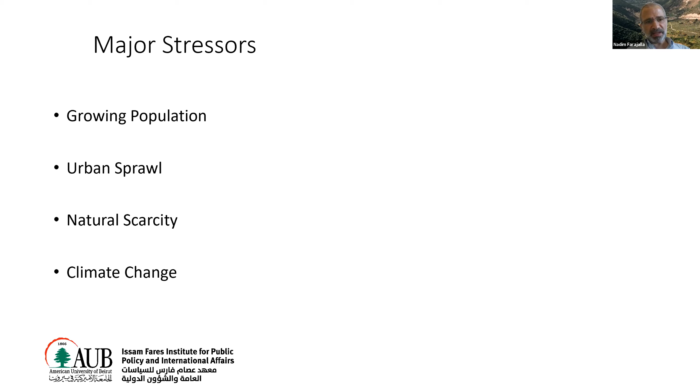Major stressors for Lebanon and everywhere around the world: there is a growing population requiring more water. Urban areas are growing, especially in Lebanon, horizontally rather than vertically, covering permeable surfaces so that water no longer percolates into the subsurface. In Lebanon, there is a growing natural scarcity, and as in most of this region, climate change is adding to that. So these are our major stressors.

Whenever you have a growing population and a growing economy, the demand for water always increases. And when you use water, you typically pollute it and return it. Most of the water that we take in is returned as sewage. So the water we get, 85, 90% at times more, is returned as sewage.

If that sewage is not treated and is dumped into water bodies, these water bodies are taken out as a source of water, and there becomes less and less water available for consumption. Hence, as the growing economy keeps growing and people grow more, there is a competition for an ever more scarce resource. This is where the major part of the problem occurs.

In Lebanon, the interesting and difficult thing is that 70% of the population lives along the coast. And in 60, 65 years, this has nearly doubled. It's phenomenal. 80% of the people live in urban settlements, and these are ever growing. The population right now is in excess of 6 million due to the influx of refugees. Originally, around 2010, it was near 4.5 million.

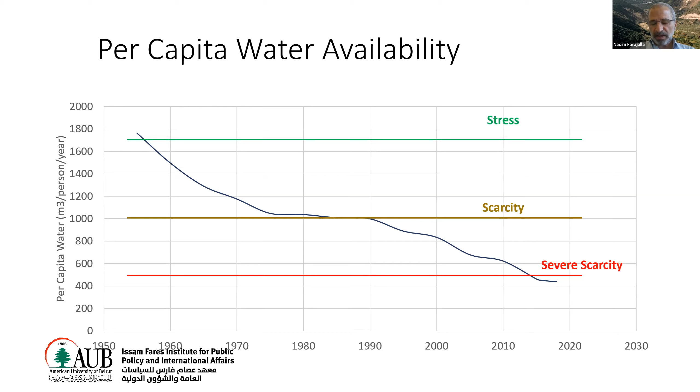So you can see how population increased and the per capita water availability dropped from being stress-free to being in scarcity. This chart shows how population was increasing and stabilizing, periodic increasing and stabilizing. Just before 2010, we were growing at nearly 0.9% rate, which is very low. However, with the influx of refugees, the population shot up, and this led to the drop in water availability to below the 500 Falkenmark index, 500 meters cubed per person per year. Now we're lower than 450, and it keeps dropping. What are we seeing nowadays?

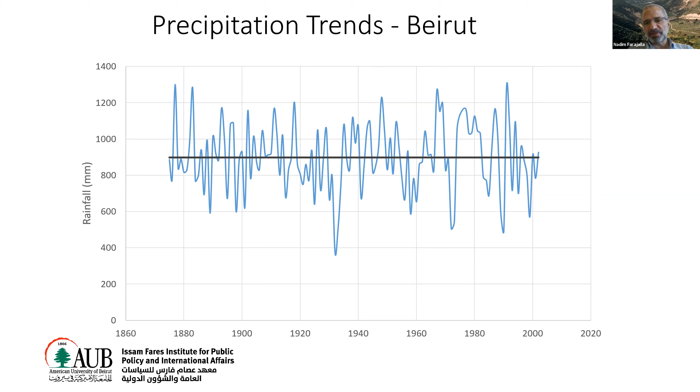If anyone tells you otherwise, they're wrong. Precipitation in Lebanon, whether along Beirut, the coast, or inland, has been constant for the past decades. In Beirut, for the data that we have at the American University of Beirut, since 1874 up until now, there is no perceptible decrease in precipitation. It's constant. There is natural variability, but it's constant. And you can see this in the Bekaa as well. For the past 60 or nearly 70 years, it's always been constant.

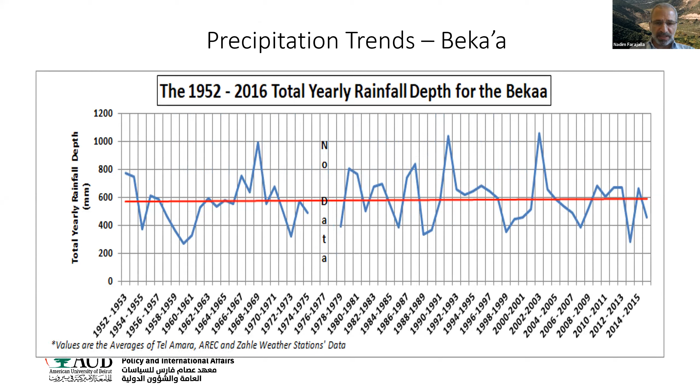Number of rainy days, again, has been constant. Temperature is the problem. The minimum temperature has been increasing, as has the maximum temperature. The minimum temperature is of concern because this is what keeps snow that falls on the mountains from melting quickly. As the minimum temperature increases, we often don't get snow and we get rain instead, and this reduces the ability to recharge groundwater.

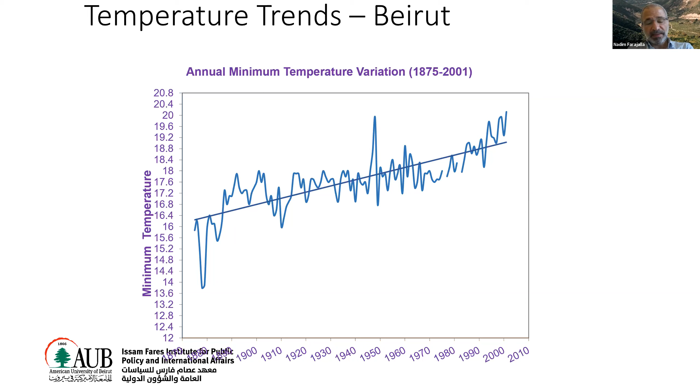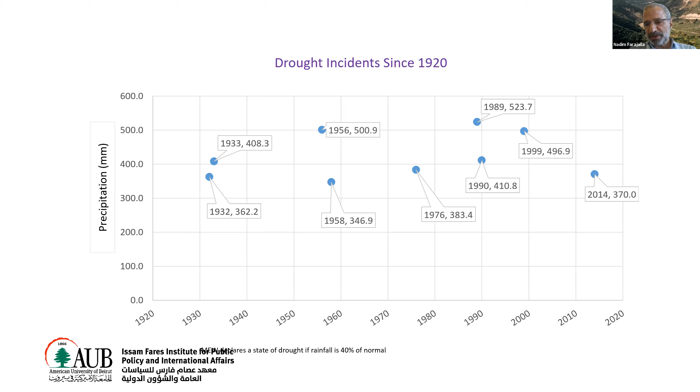Because as snow melts, it melts slowly, allowing the soil to take in the water and direct it to the subsurface. Drought incidents have been clustering and increasing. The last real major drought we had was in 2014, where only 370 millimeters of water fell on Lebanon. This is about 40% or less of what we usually get.

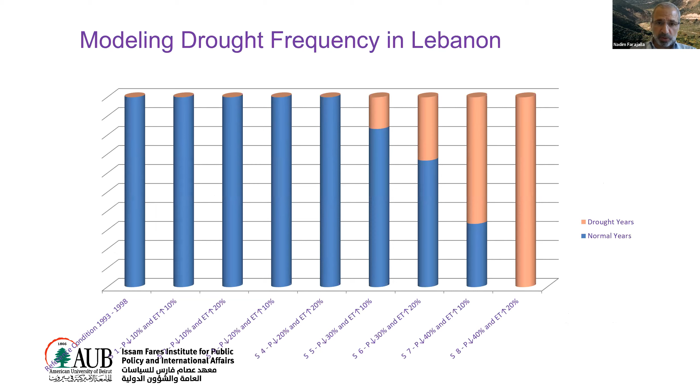And when we modeled drought, we found out that if the trends or projections that we have do become reality, instead of having one dry year every 6 to 10 years, we will get one normal year every 6 to 10 years. So that's an issue. These are givens. This is happening. Climate change is happening, and we need to keep that at the back of our mind.

The way we look at water security, traditionally we were looking at it in terms of if we have so many liters of water and so many people, how much can we provide? This is not water security. This is bean counting, and this is not good. Water security is much more than that.

Water security is impacted by hydroclimatic factors and by anthropogenic, human factors. We need to make sure that water is productive, that supports economic growth, that supports human health. We need to make it safe for consumption and safe for the environment. And we need to make sure every person has enough water to live healthily and productively. When we look at the impacts on the water sector, there is an impact on governance, on supply, on infrastructure, risks and hazards, economics, etc.

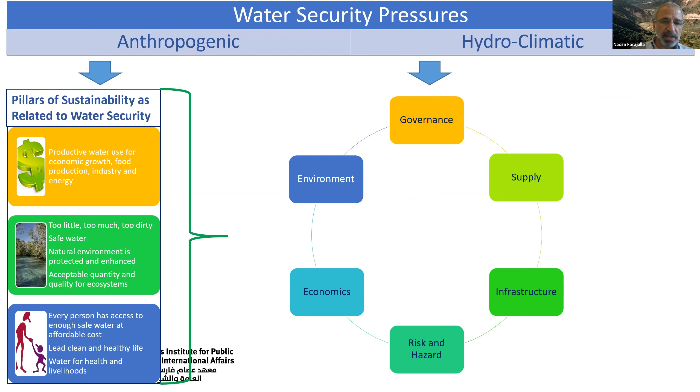All of this made us at the Issam Fares Institute come up with 6 pillars of water security. We call them household water security, which is how much water is made available to homes and also to farmers, and environmental water security, when we look at the water quality from the sources from which we take water and to which we send back our water.

We look into hazards and risks. We look into economic water security: how much are we making, or how well is the economy doing given the amount of money we pay into the water sector? How is our infrastructure doing? Because if we have an abundance of water at sources, but we don't have the storage capability or the conveyance capability, we might as well not have water. And then water governance: do we have the right policies? Do we have the right regulations?

Do we have the proper human capacity in the institutes to run them, to manage the water sector? Are we collecting the fees that we are charging? Are we charging fees fairly to have cost recovery? These are issues that are really central to making sure that Lebanon is water secure. And herein lies many opportunities.

The key I want to focus on, especially through the clean tech sector, the clean tech approach, is energy in the water sector. Electricity makes up 70 to 80% of the payment, or the cost, for the water establishments, because 70 to 80% of electricity consumption is in pumping.

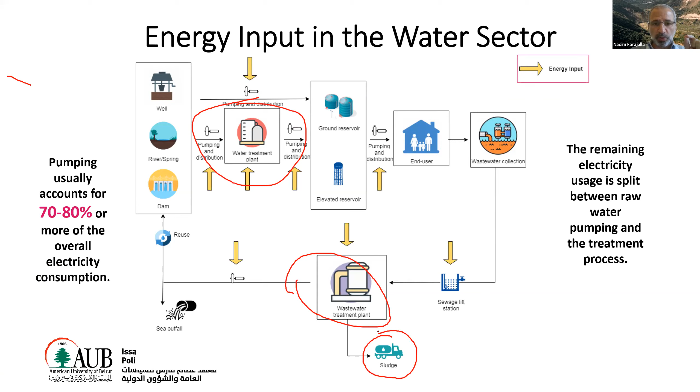In Lebanon, the wastewater treatment facilities that we have are not operational mostly because they don't have enough energy. And wastewater treatment facilities, keep in mind, can be a great source of water for reuse. They can be a great source of energy. When we digest sludge, we can produce methane that can be used to generate electricity or to power vehicles.

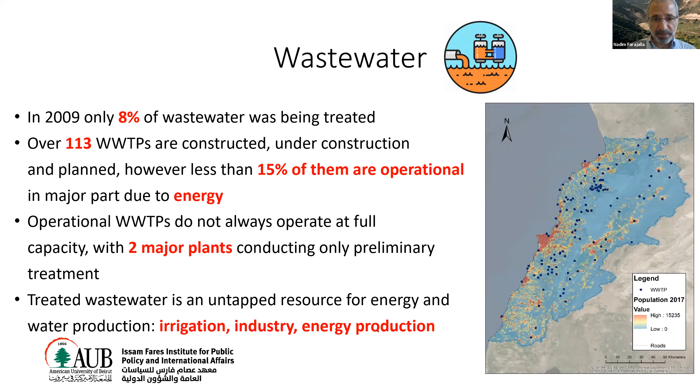We looked at Lebanon. The problem here is we have 12 to 15 hours of outage. Now it's even much more. The regional water establishments suffer from high electricity bills. Only the Beirut Mount Lebanon Water Establishment paid its electricity bills in full.

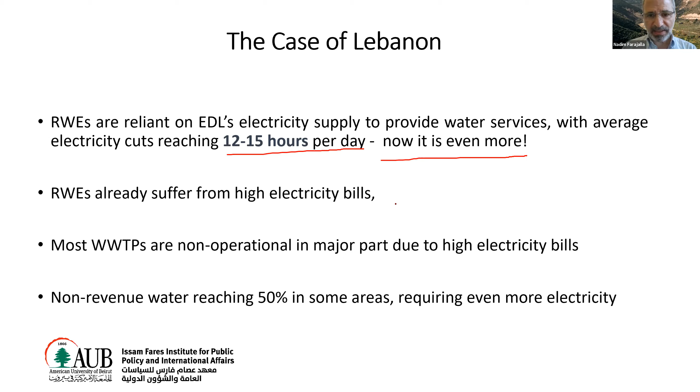And non-revenue water, that's the water that's lost in the networks and from people illegally hooking up to the network, is at times 50%. That means we are pumping water into the network, paying for fuel to pump water, and 50% of what's pumped is lost. So you are losing 50% of your money that goes into pumping. And keep in mind, 70 to 80% is pumping.

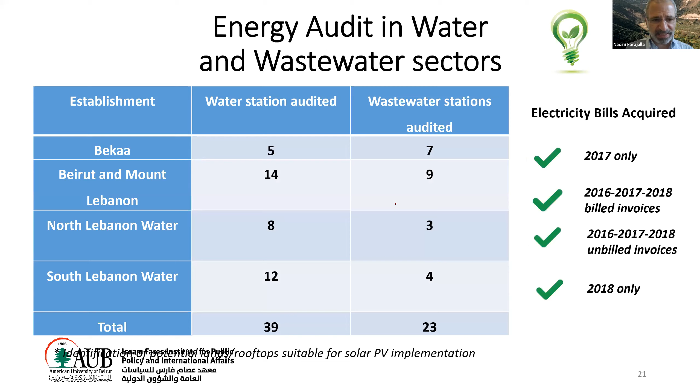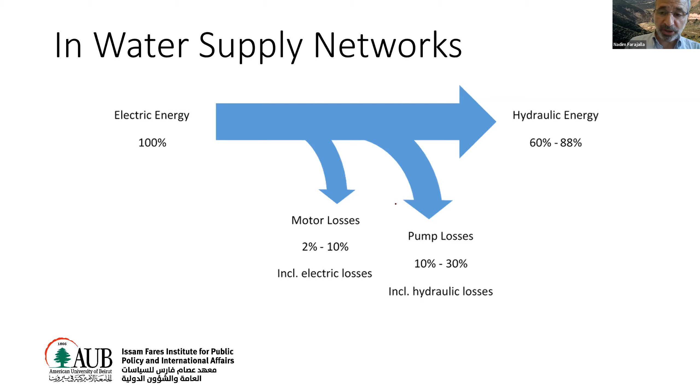We did a huge study that looked at 62 facilities, whether water or wastewater, and we did an audit. What we found out, this is just a guide for you guys: electric energy goes into motor losses, into pump losses, and the rest goes into producing hydraulic energy. Typically, if we are doing well, we have about 88%, 90% production of energy. If we're not, it goes lower.

The key takeaway of our studies, I'm going to go to two so that I'll leave time for discussion. There is no direct correlation between stations with high electricity bills and the performance of their pumps. We found out that in many areas, pumps are not working properly, but still the bill is reasonable. And in other areas, the pumps are working fantastically well, but the bill is high.

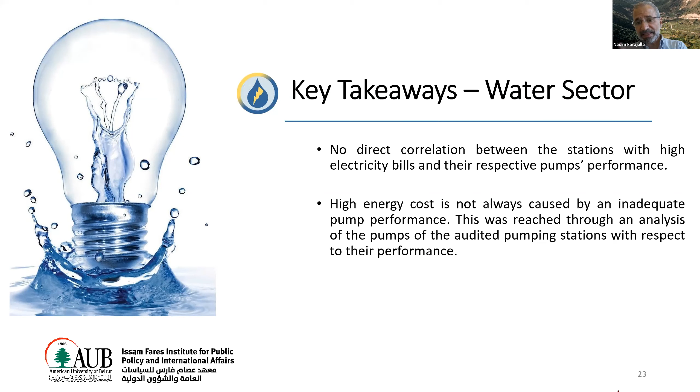The high energy cost is caused by inadequate pumps, but not always. We need to look at the design of the network and how it is operated. In wastewater, the design is important. We need to look at how we're designing the facilities, whether they are activated sludge, whether they are bioreactors, and the size. We found out, surprisingly, that smaller plants are more energy intensive than larger ones. So the scale needs to be adjusted, and we need to find a proper balance.

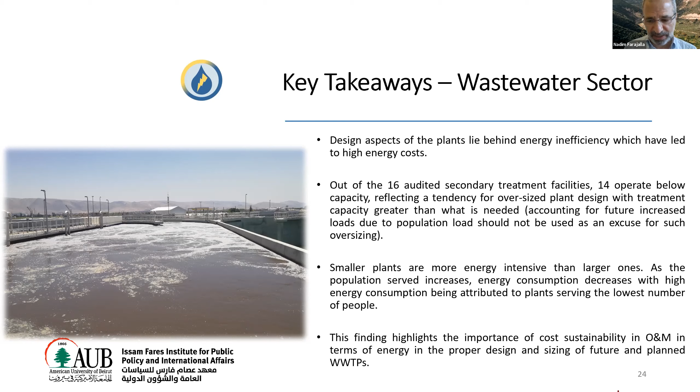And in both cases, in wastewater and water, the costs in operation and maintenance are critical to maintaining energy efficiency. So we need to be energy efficient in that sense. I will stop here and open it up for questions and discussion. Thank you.

Thank you, Dr. Nadim, for this great presentation. It's good to see that there are studies being done in Lebanon, because we always feel that we're lacking the numbers and the analysis, not only in the water sector but in many sectors in Lebanon. So hopefully these studies can be translated or taken into consideration while setting the strategies and the policies.

Yeah, Susie would have told you that this study we did is feeding directly into the new water sector strategy, the revision of the water sector strategy. It's a major part of it, and they're looking at energy efficiency and transitioning into renewable energy in the water and wastewater sector through that new strategy. So yes, they are.

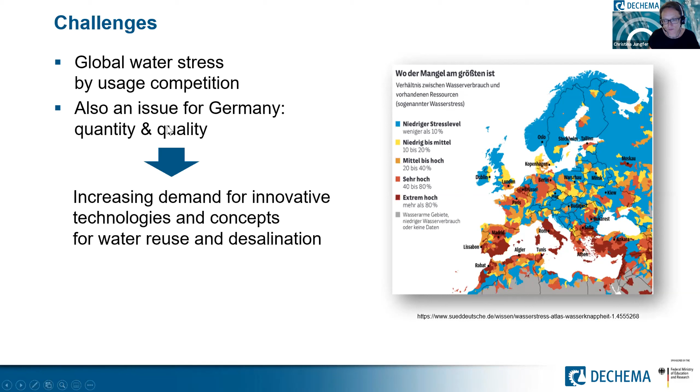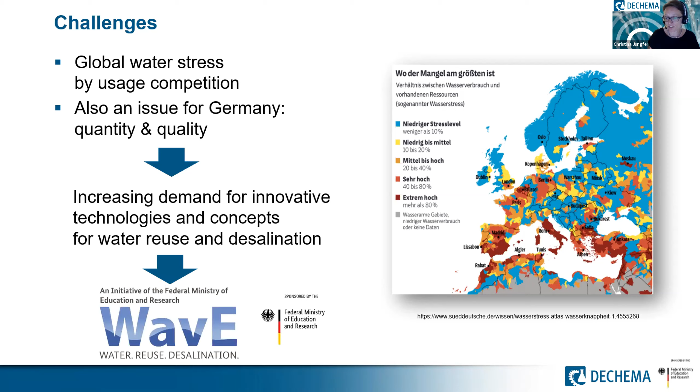So there is an increasing demand for innovative technologies and concepts for water reuse and desalination, for Germany and abroad. The Federal Ministry of Education and Research recognized these challenges at an early stage and started the funding measure WAVE already in 2016.

This shows its importance for Germany. The Federal Ministry of Education and Research funded this measure with a total funding volume of 32 million euros. We had 13 joint research projects with more than 80 partners funded in total, with high involvement of SMEs and industry.

WAVE was complemented by a scientific support action coordinated by DECHEMA, by us. The projects ran from 2016 to 2020. The project sites were located in Germany and abroad—we had 2 project sites in Vietnam and 1 in Namibia.

The main topics in this funding measure were three: water reuse by utilizing treated municipal wastewater, circularity and reuse of industrial water, and the desalination of ground and surface water.

Beside these 3 thematic areas, we had also cross-cutting topics that were interesting for all thematic areas and for different projects. This was risk management, which is crucial when practicing water reuse. Also crucial is the topic of salt and residuals, including the handling and management of concentrates. This is very important, especially for the industry, but also for other sectors. And of course the topic of technologies and processes, in terms of assessment of water reuse technologies and processes, or defining key performance indicators for these approaches.

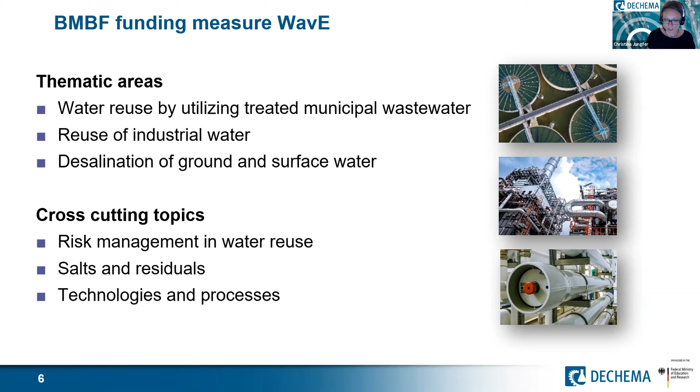The aim of the funding measure was to increase water availability, decrease the dependency on freshwater resources for different sectors, and therefore reduce usage conflicts and contribute to sustainable development. The 13 projects achieved these aims, and I will show some more details later. Our strategy was not only to develop innovative technologies and management concepts, but also to demonstrate them in Germany and abroad, have references, and be prepared for transfer into practice, so that these technologies and concepts can be implemented successfully.

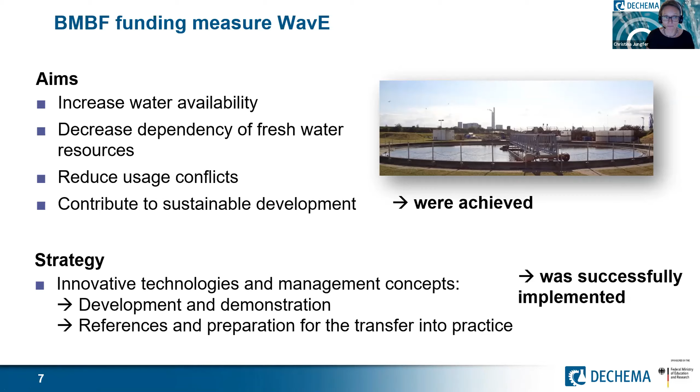Here you can see an overview of the solutions developed within WAVE. We had different solution approaches, for example increasing water availability by using treated municipal wastewater and developing flexible process chains to produce different qualities of water that can be used for different sectors and purposes. Also for groundwater recharge, this was a topic, and here multi-barrier processes and smart systems were developed.

For agricultural reuse, we used treated municipal wastewater and developed high-tech and low-tech technologies. For example, hydroponic systems, a high-tech technology, for reusing and making good use of the reused water, or also with ponds, cleaning the water within ponds, a very low-tech technology.

Also for coastal resources, meaning salty waters, efficient membranes were developed, modular concepts were created. For industrial solutions, integrated solutions, we wanted to find solutions for concentrates, what to do with them, how to manage water very well in industrial parks, reuse it better, and find solutions for different industrial sectors: chemistry, steel, automotive, mining, oil and gas, and ceramics. I will show a bit more later.

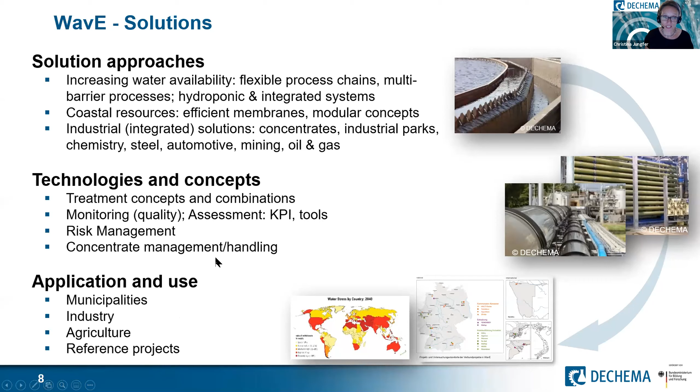We developed different technologies and concepts, treatment concepts and combinations. Monitoring was very important, including assessment with KPIs, assessment tools, risk management, and concentrates. The application was really for different sectors: reuse in municipalities, industry, and agriculture. We showed everything also in reference projects.

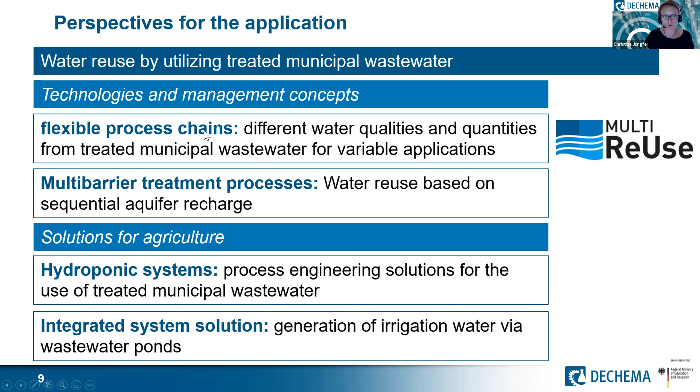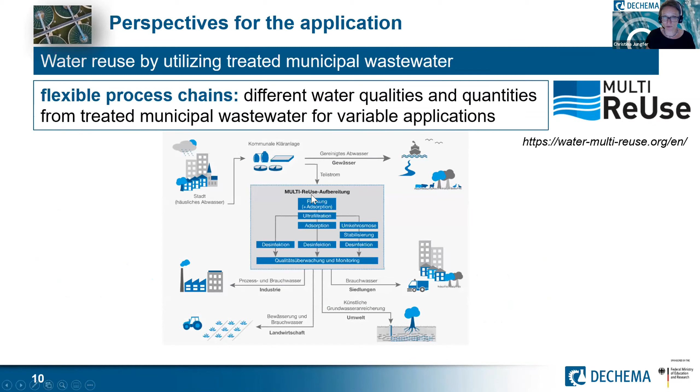I would like to pick some projects out and show you some insights. For water reuse by utilizing treated municipal wastewater, we had 4 different projects, and I will show you the MULTI-ReUse project. This project developed flexible process chains, producing different water qualities and quantities from treated municipal wastewater for variable application. Let me show you this a bit more.

Usually treated wastewater is being fed into the rivers. The focus of the research project was to reduce this instead, reusing with flexible process chains different qualities of water for different sectors like industry, agriculture, aquifer recharge, or municipalities.

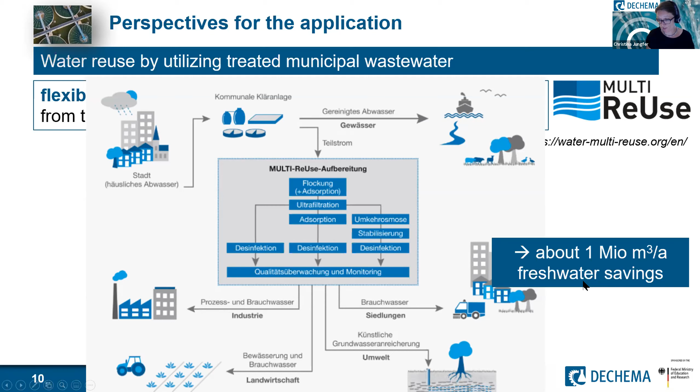New technologies and methodologies for reuse of treated wastewater were developed and tested in a pilot plant in the north of Germany. Reliable procedures for quality control of water were also developed, along with an evaluation tool and a concept to market the project results. What we achieved is that with these results you can achieve about 1 million cubic meters per year in freshwater savings.

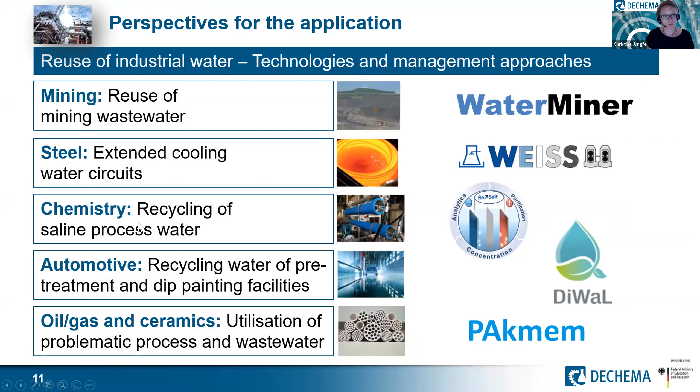Going to the next topic, the reuse of industrial water. We had a lot of projects developing solutions in different sectors, and I brought with me the example from the steel industry, which was looking for extended cooling water circuits. Water is an essential element for process and product cooling in the steel industry.

Due to the complex chemical composition of cooling water, caused by the use of cooling water treatment chemicals or the introduction of solids, oils, greases, and so on, no chemical-free and economic treatment process has yet been established on the market. The aim of the project was to increase the efficiency of cooling water use, reduce the amount of blowdown water by 50%, and thus reduce freshwater involvement.

In this project, different innovative technologies were developed for desalination, for example capacitive deionization, or fouling resistant coated reverse osmosis membranes. They also looked at how to manage concentrates, using high pressure reverse osmosis for concentrate removal or evaporation. These process concepts were developed in combination with a simulation tool.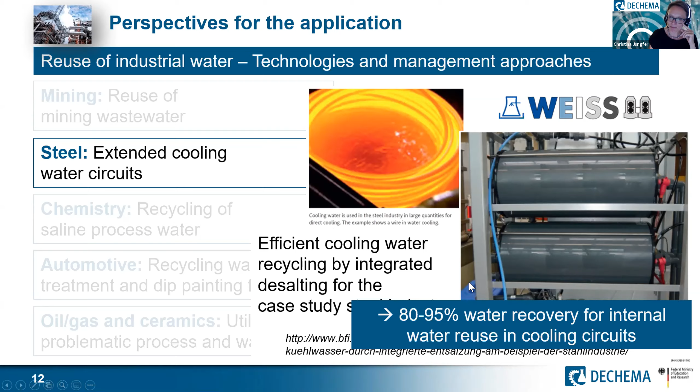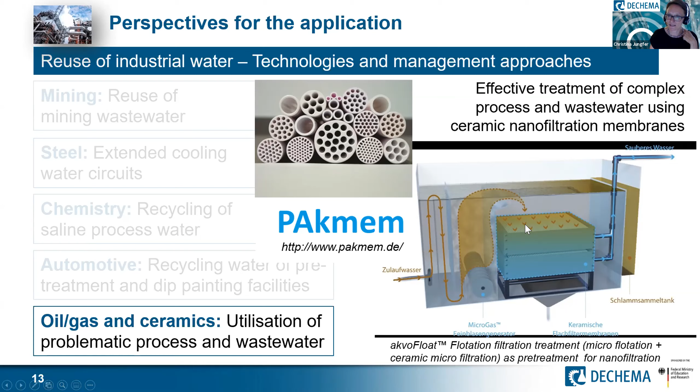Another example is from the oil, gas, and ceramic industry. There are very complex process and wastewaters, and here effective treatment was developed with ceramic nanofiltration membranes. You can see the flotation filtration treatment: microflotation and ceramic microfiltration as pre-treatment, then nanofiltration using ceramic membranes.

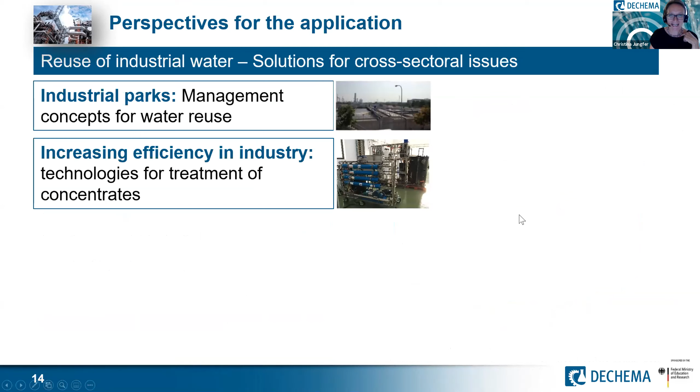For cross-sectoral issues, we had one very interesting project looking at concentrates arising from industrial water reuse. In addition to conventional water reuse, this project includes a separate concentrate treatment to separate and recycle these salts, with a lot of innovative technologies involved.

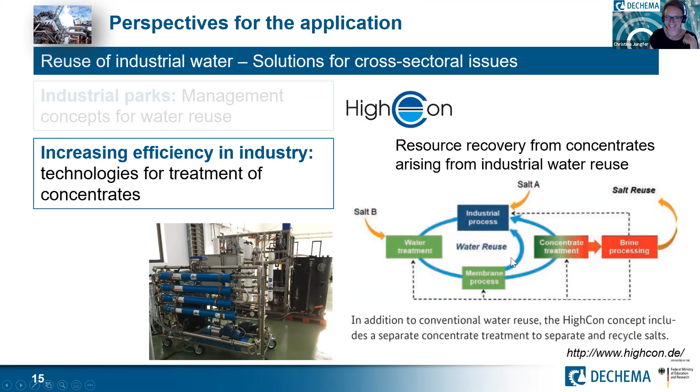So, perspectives for solution providers and water users - I think the WavE funding measure was very good for perspectives on water reuse. We saw a lot of saving of fresh water, reduced wastewater discharge, reduced resource and energy use, and more cost effectiveness.

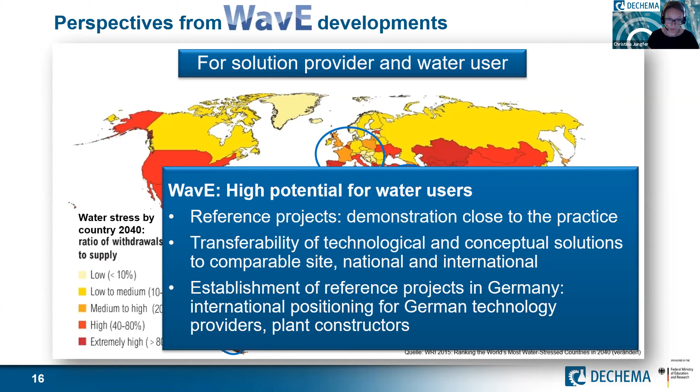What was also very important is the transferability of these technological and conceptual solutions to comparable sites, not only in Germany but also internationally abroad. So it's very important for German technology providers to really go out and show their results and solutions there.

If you're interested in more information, in 2020 we published a WavE special issue in the IWA journal, Water Reuse and Desalination. This is free, you can download it from the internet, and we have about 20 articles in it with a lot of solutions and very interesting insights from WavE.

So I talked today about the funding measure WavE, and the Federal Ministry of Education and Research decided to start a new funding measure. This started in 2021 and will run until 2024, with very similar topics to the first one - again about water technologies and reuse. We're looking forward to these new projects and solutions, and DECHEMA will again be part of this funding measure.

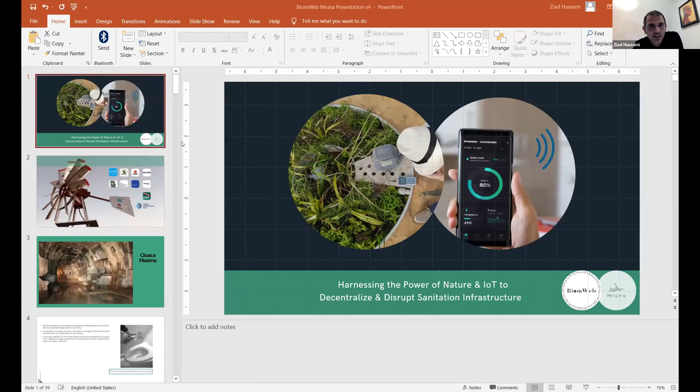So I think Ilyas invited me just to discuss the journey into the entrepreneurship field. And I think I'll just start with a small slide, a couple of small slides, and we can discuss some things. Can you guys see my slides? Can you give me a thumbs up, Christina?

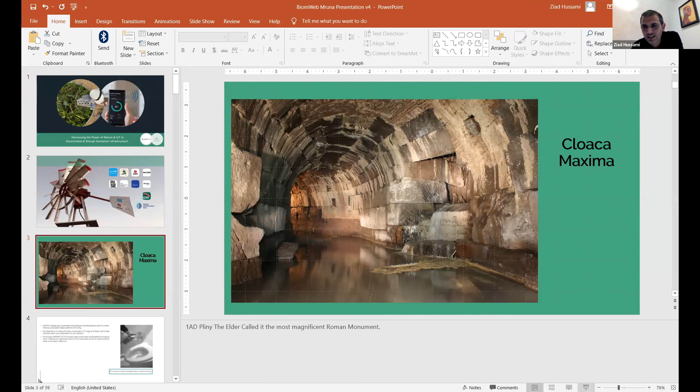So until today, mostly, maybe until recently, the way we think about sewage infrastructure really hasn't changed that much. You want to get it underground in a pipe and as quickly as possible outside the city and make it someone else's problem. So in places like Lebanon, that causes some issues. Here we'll build some centralized sewage treatment stations, which is why I was having a discussion with Mr. Nadeem, that are built by donors but are never connected to anything because 80% of your cost is in building the actual sewer network.

So previously, when I was a consultant at AECOM, it's a design consulting firm, and it's the biggest in the world, we had a developer call us to make a sustainable villa community. And they really wanted us to design a sustainable villa. But when we started looking at it, we had architects, we had infrastructure guys, the issue starts way before looking at the actual plot level. It starts with the infrastructure. And the way you design cities is around the infrastructure, and it starts with that.

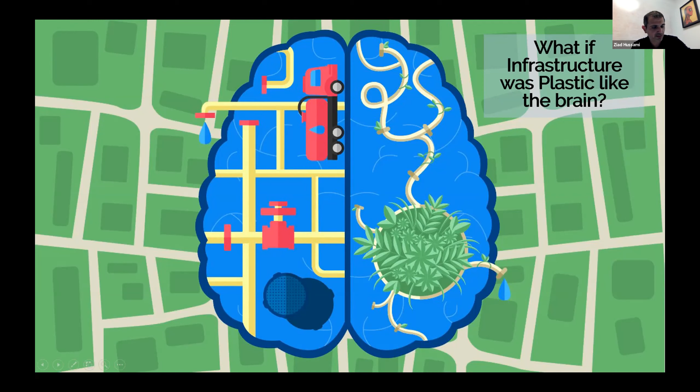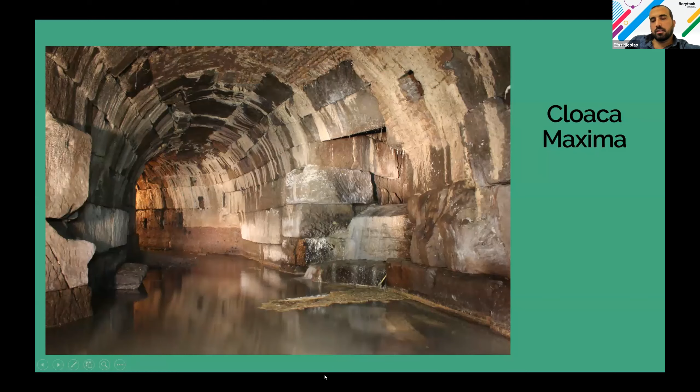If anyone has any questions - and anyway, we're a little over time. So thank you, Elias. Thank you, Ziad, for this interesting testimony, I would call it. We've enjoyed the ride together, I believe, and I believe you're on the right track to succeed. You already have lots of competitions proving you have a good product in your hand. Thank you for joining us.

Yeah, and we got our factory up and running with lots of business going, and that was directly with the help, funding and technical support of Berytech. Thank you, Ziad. So, great. Still... yeah, us to visit, eh?

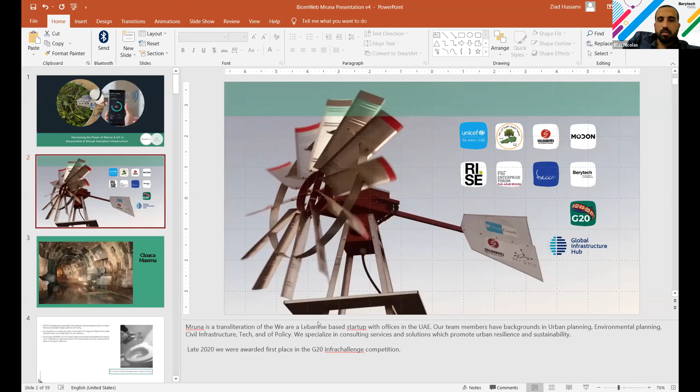Okay, so... if we have no questions...